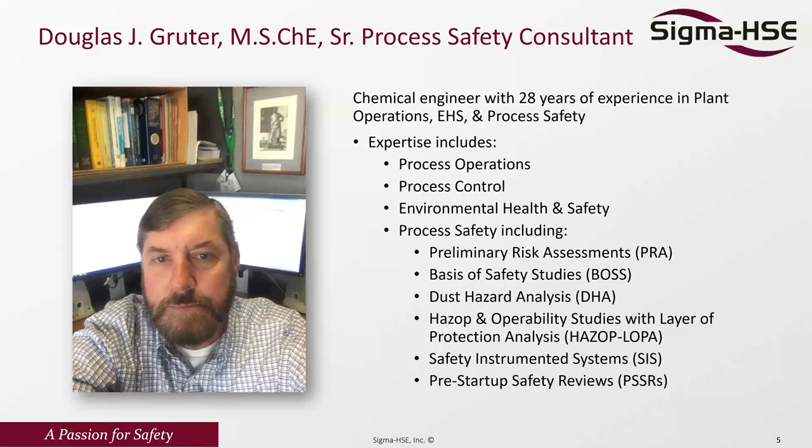This presentation will outline risk assessments during each stage of a process in a PSM facility. We will go from early stage evaluations to design phase evaluations, and then a pre-commissioning, pre-startup safety review. After the process or unit operation is started up, we will go through what is required for management of change, 5-year revalidations, and incident investigations.

What this presentation will not cover are dust hazard analysis, HAZID, facility siting or occupied building risk assessments, but Sigma can complete these if it is needed at your facility.

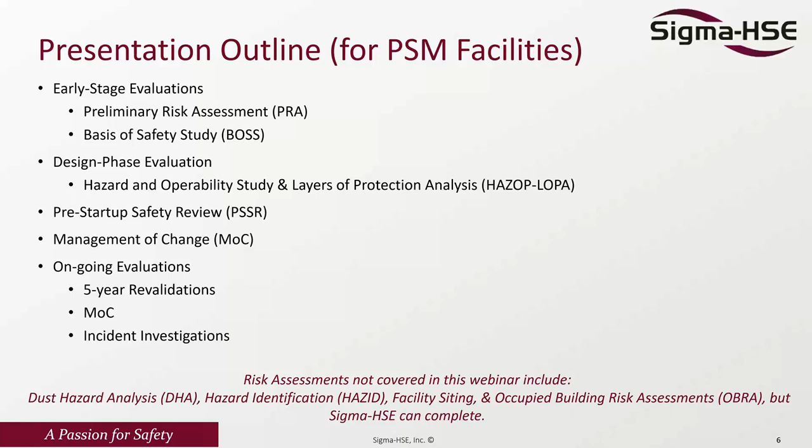The different stages of process hazard analysis, of which there are many types, starts out at the conceptual phase of the project, where a preliminary risk assessment, a basis of safety study or HAZID, should be performed to outline the risks you will be facing. Then we go into the design phase evaluation, which will include a HAZOP, or a combined HAZOP-LOPA, and a facility siting or an occupied building risk assessment.

After the construction of the project is nearing completion, we will do a pre-startup safety review to ensure that all of the recommendations in the previous 2 stages have been completed and are in place. Any changes during the pre-startup safety review should be handled under a management of change.

And then post-commissioning, the ongoing evaluations that are required are 5-year revalidations, management of change for any changes that are not a like-kind replacement, and incident investigations. And the cycle goes on from there, where during the 5-year revalidations, you will be reviewing any management of change documentation or incident investigations, and they will be incorporated into the revalidations.

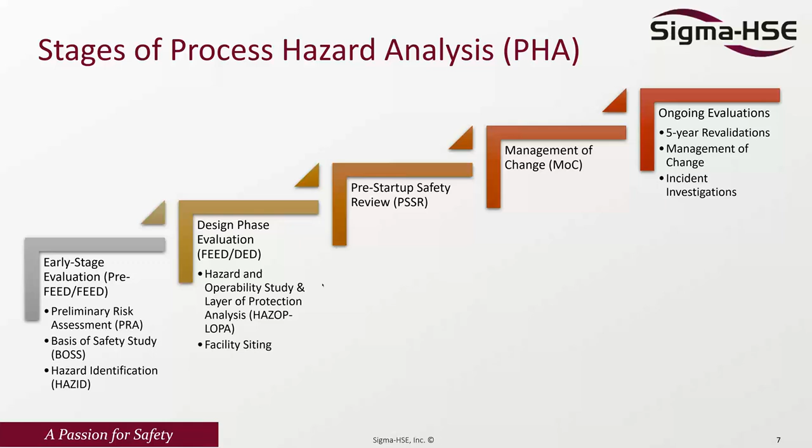So let's start at the beginning with a preliminary risk assessment. This is a screening tool used to determine any big roadblocks or concerns that will need to be addressed, and thus add costs to the project. So it's completed at the very start of the expansion.

It covers fire, explosion, chemical reaction and release, environmental concerns, inventory, shipping, noise, and also looks at any impacts it will have to facilities around the site, such as schools and daycare centers. This is conducted at the concept stage of a project and is often used as a go, no-go.

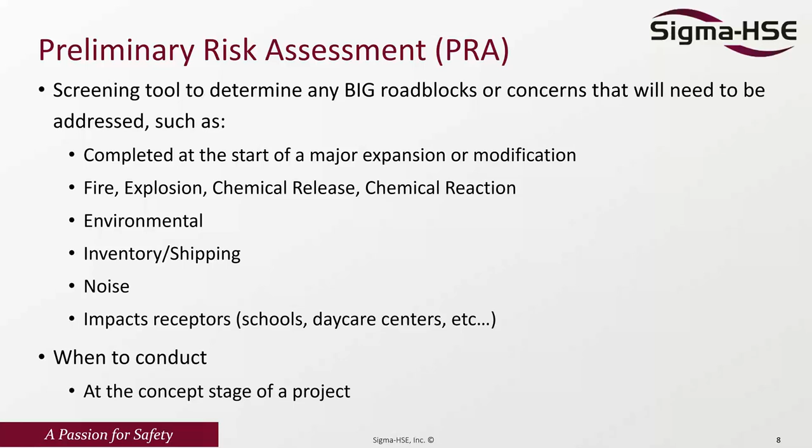So what you'll see is that in each stage of these risk assessments, different levels of process safety information will be required. For the preliminary risk assessment, you'll need to know something about the site, its topography, wind rose data, chemical inventory shipments, and then a number of hazard identification questions are asked, and they roll up into a preliminary risk screening.

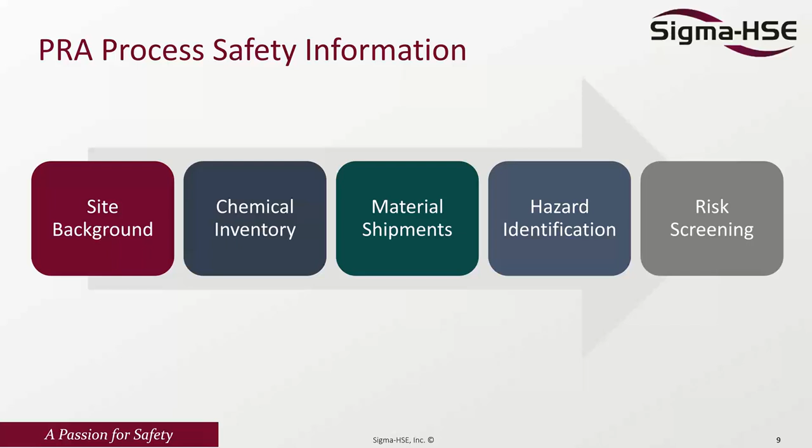Okay, after this, the project moves along, and we do a basis of safety study, which is an equipment-based study completed in the early stage design, but before you request any money. Okay, and it covers fire, explosion, again, chemical release and reactions. The intent here is to capture 90% of the safeguards required before you request funding. And this is so you can request the funding needed for any process safety concerns that come up.

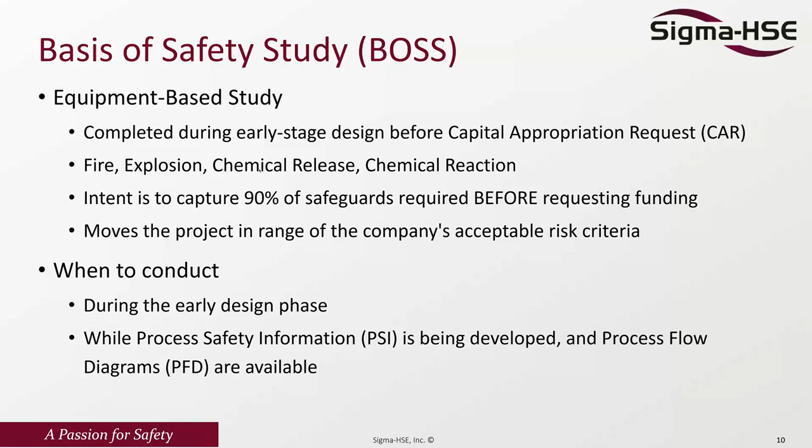It's used to move the project into an acceptable range of the company's risk criteria. It's conducted in the early design phase while the process safety information is being developed and when the process flow diagrams are available. Some of the process safety information required for a basis of safety study at this stage are the process flow diagrams, materials of construction, relief system, and ventilation. The more information that you have at this stage of the project, the closer your estimate will be to request enough funding to complete the project.

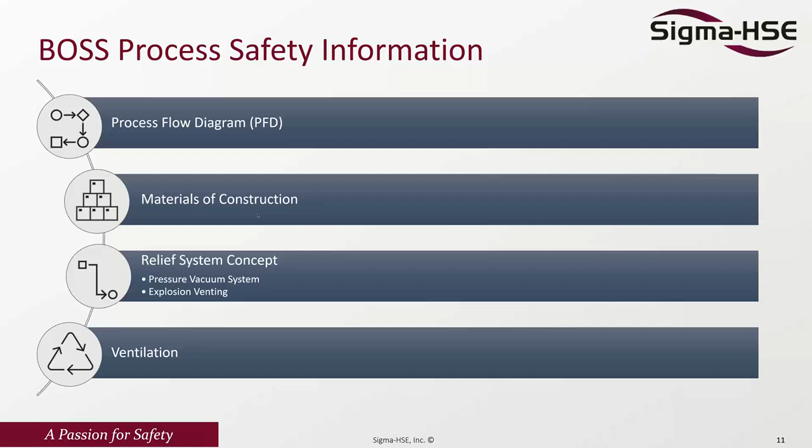After the process safety information is put together, you will also be developing a list of additional process safety information that you will need for the next stage, which is a HAZOP and LOPA, or a combined HAZOP-LOPA. This is completed following the detailed design, after the CAR is approved, and it's a detailed line by line, vessel by vessel safety study. It identifies the detailed design safeguards and, more importantly, ensures that they are independent layers of protection so that credit can be taken for them. That is, they are not subject to common cause failure.

At this point in the project, we should be pretty close to getting to the company's acceptable risk criteria. And if we're not there, we will add additional safeguards as needed. We conduct the HAZOP after the detailed design is completed, but before the pre-startup safety review. So now we're in the construction phase of the project, and P&IDs must be available to complete the HAZOP.

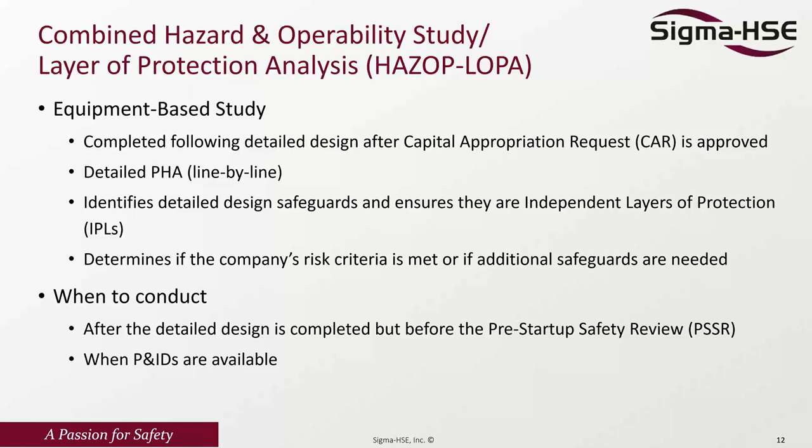You'll see on the next slide the process safety information required: P&IDs, materials of construction, hazardous area classifications, relief systems, ventilation, usually important in flammable atmospheres, and safety systems, such as basic process control system loops, any interlocks that are either in the BPCS or in a safety instrumented system, and the alarms.

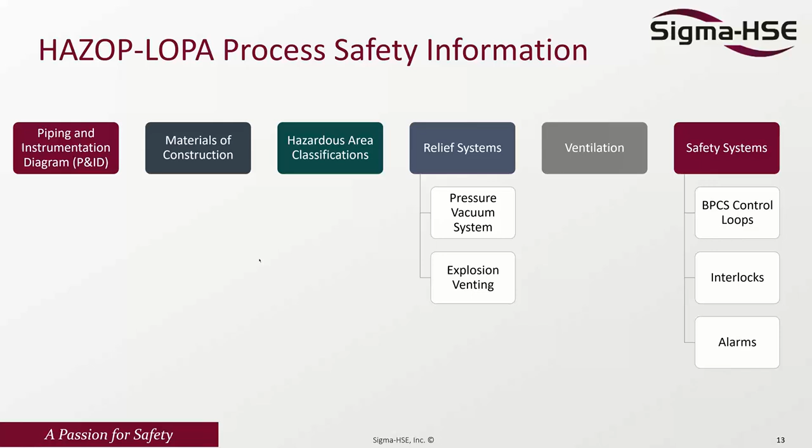After this, construction takes place, and before commissioning, a pre-startup safety review is completed. This is the last safety review before commissioning. And what we need to do is to ensure that the equipment is installed in accordance with design specifications, that the operating procedures are in place and the employees are trained. And very important is that the analysis from previous PHAs, being the preliminary risk assessment, basis of safety study, and the HAZOP, have been implemented or resolved.

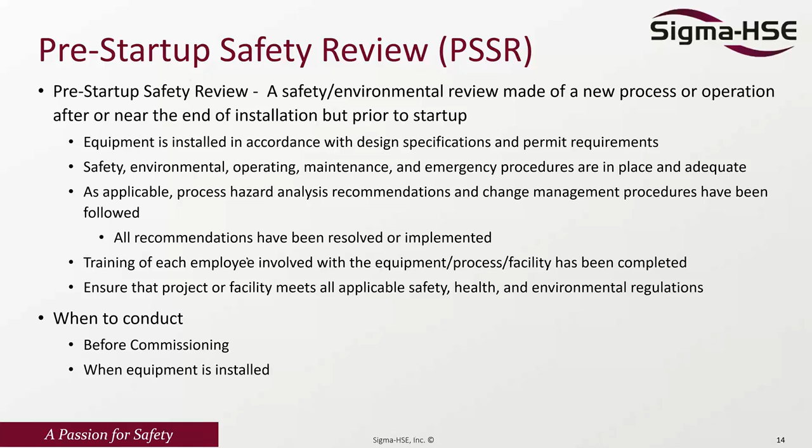So the purpose is to ensure that the project meets all of the applicable safety, health, and environmental regulations. This is conducted when the equipment is installed and before commissioning. Process safety information needed for a PSSR is pretty much everything up to this point: P&IDs, the chemicals, operating and training, emergency and contingency plans, any management of change, PHA recommendations, permit reviews, and any additional perceived risks that are picked up during the field walk.

Typically, this involves a checklist, and Sigma-HSE has a number of different checklists that are used depending on the scope and risk of the process. So now your new process is in operation. Everything's running along, but we're still not done after this.

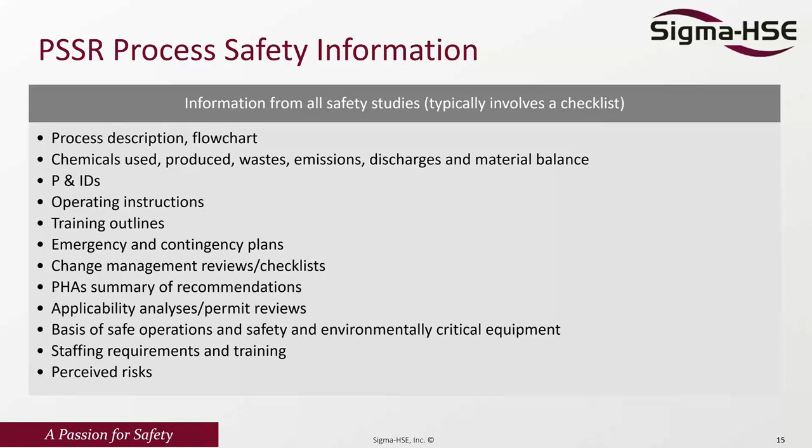The ongoing studies post-commissioning required are a 5-year revalidation, any management of change that takes place, any incident or event investigations. Typically, insurance companies will ask for an audit, and a facility siting needs to be revalidated during the PHA 5-year revalidation. The post-commissioning studies are completed every 5 years after commissioning and involve management of change, incident investigations, and insurance audits. All 4 of these should roll up into the 5-year revalidation.

So for the life cycle of a PSM plant, you'll notice that each stage requires a different type of PHA. The type of PHA going through the life cycle gets more and more detailed. And in addition, more and more process safety information is needed. Any gaps may result in hazards and harm to people, environment, or monetary losses for the company.